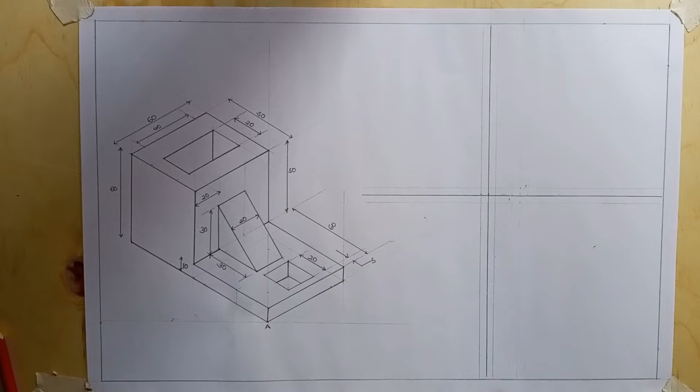Today we are going to look at the construction of orthographic views from this isometric view. So let's get started. So we are going to draw these as orthographic views in first angle projection. Remember, in first angle projection, the plan is ever down, the front up, then the end elevation this side.

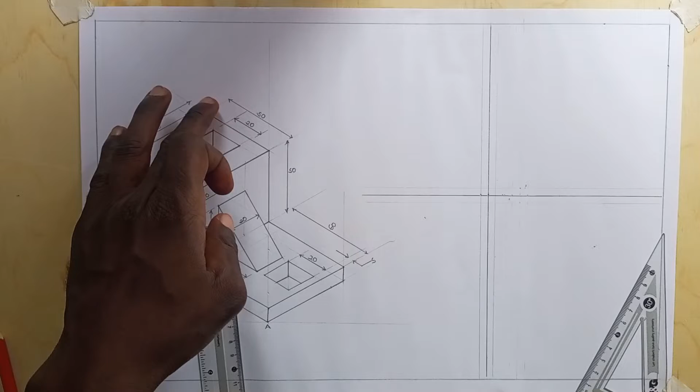So let's get started. So for the plan, I'm going to be looking at this isometric object from up. When you're looking at this object from up, you'll be seeing this face here and also this face here, inclusive of this square hollow plus this slanting edge. So first, I'm going to get the total length of this object, which is 50 plus 60. That's around 110 millimeters.

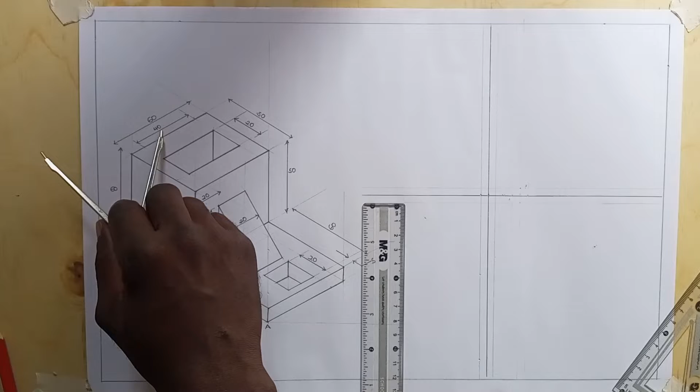So I'll measure off 110. So I also mark off 50. Okay. So in this top section, I have 50, but then I have also this hollow that goes up to the bottom, and its width here is 20 and the length is 40. So I just want to locate it here on the plan.

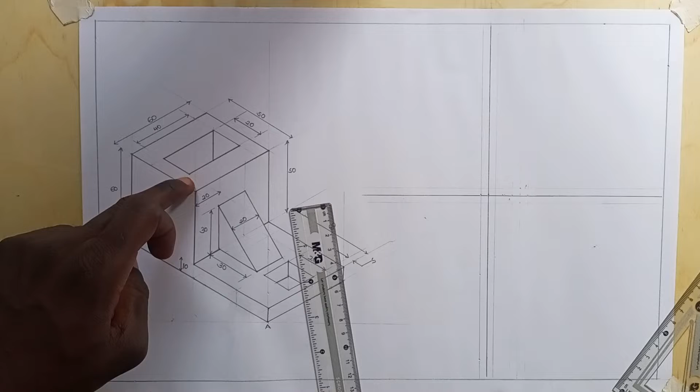So I get my 50 minus 20. So when you get 50 minus 20, you get 30. What does it imply? That this rectangle hollow is offset 15 millimeters off this edge and also 15 millimeters off this edge. So I'll measure off 15, then also this side measure off 15. Okay, so right here I'll measure off 60.

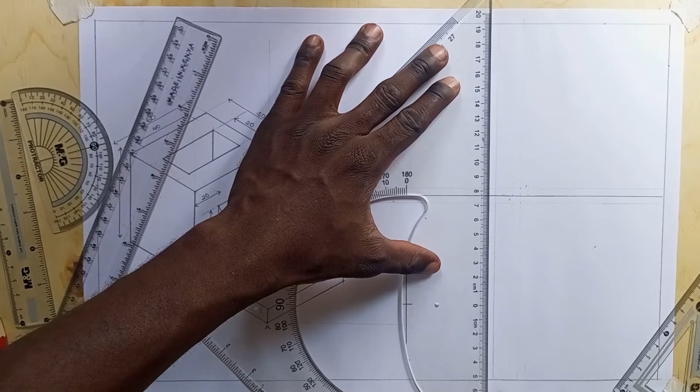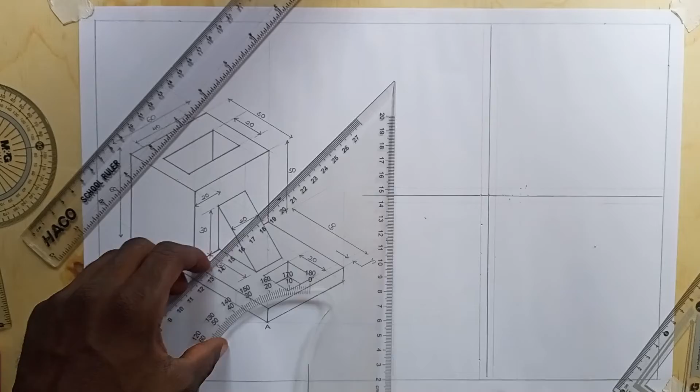So I'll slide off this line till it is at 60. I'll try to make it longer. Okay. So I'll also draw that line.

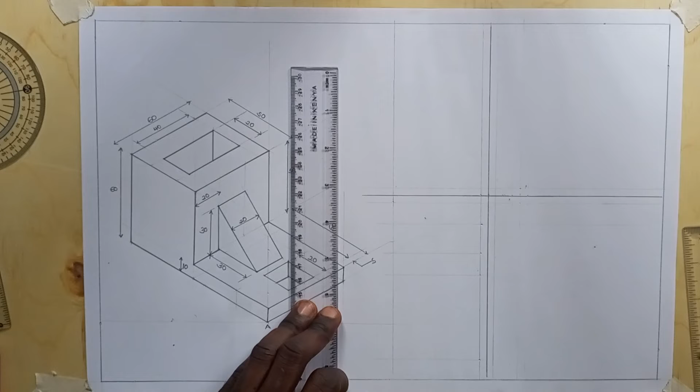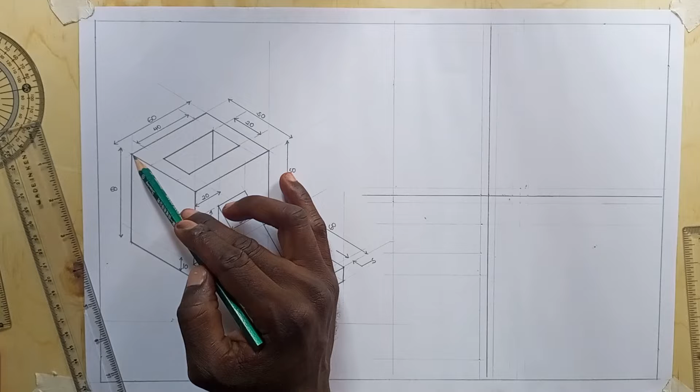Okay. So when you're done, you're going to get the offset distance of this rectangular hollow from this edge here. So if this total length here is 60 minus 40, we get 20. That means this is 10 and also this is 10. So I'll measure off 10 millimeters here. Then I also do the same thing here.

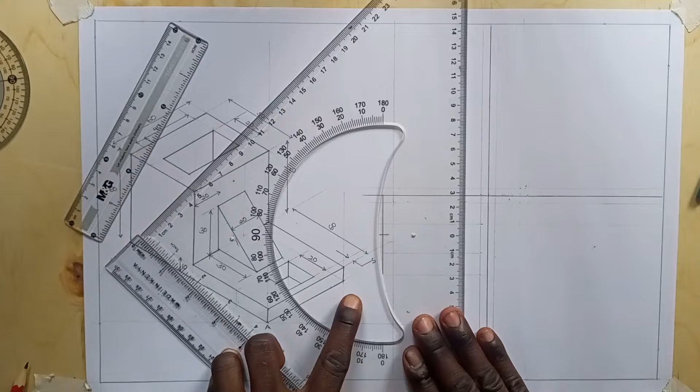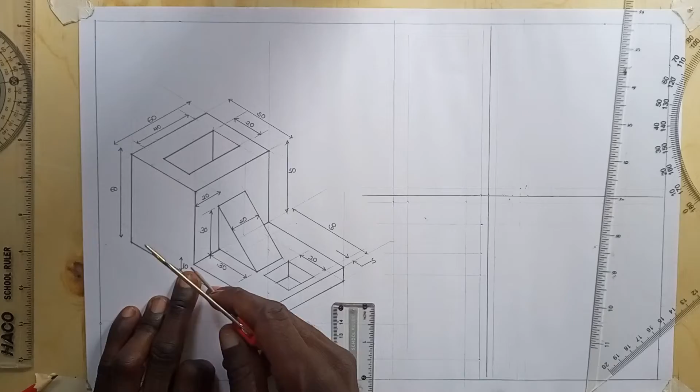Okay. So we are done with this upper surface. So I want to show you how we can draw this other upper surface. Remember, we are up. So this is how you do it. Remember, we want to draw this slanting surface. So it is 30 millimeters off this edge, which is this. And remember, we are seeing it from up. So I'll measure off my 30.

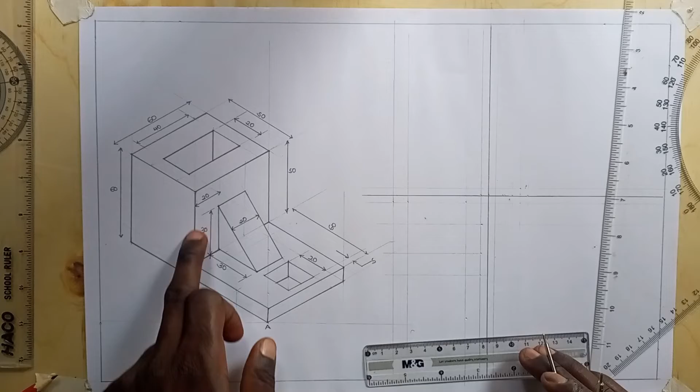Then this slanting surface here, it is 20 millimeters off this edge. So I'll also measure off 20 here. Okay. Then I'll also measure off this 20. And this also should be 20. Okay.

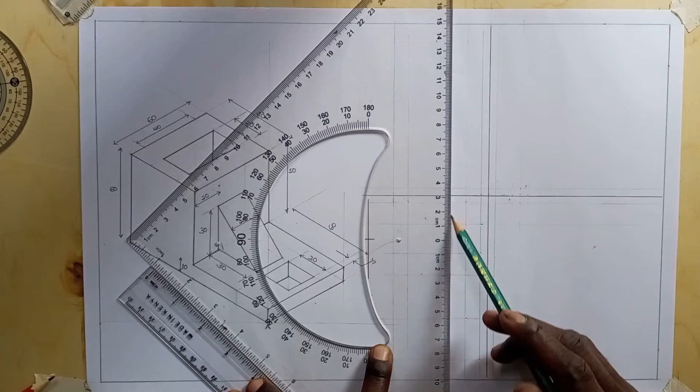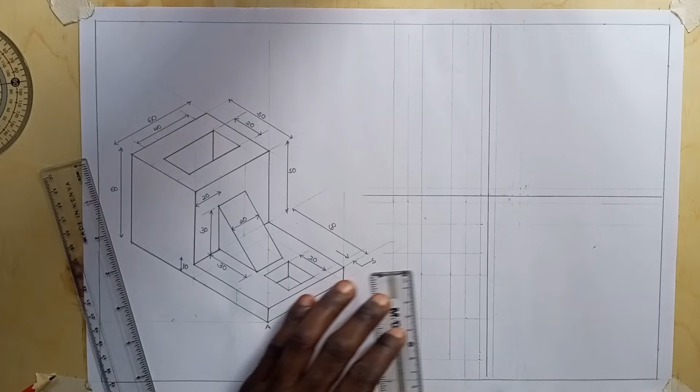Okay. When you're done with drawing this slanting surface, the next thing we are going to locate is this square hollow. So I indicated here that it is offset 5 millimeters off this edge here. So I use my ruler and I measure off 5. Then I'll also measure off 20 here.

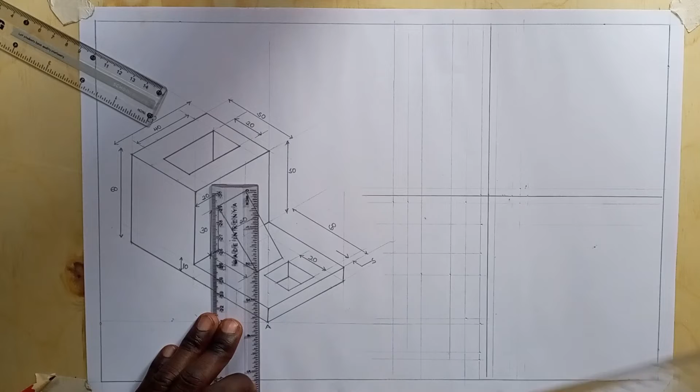I'll draw that line. And also that line there. So when you're done, we shall make our plan lines thicker such that we can bring out the real picture of how it should be.

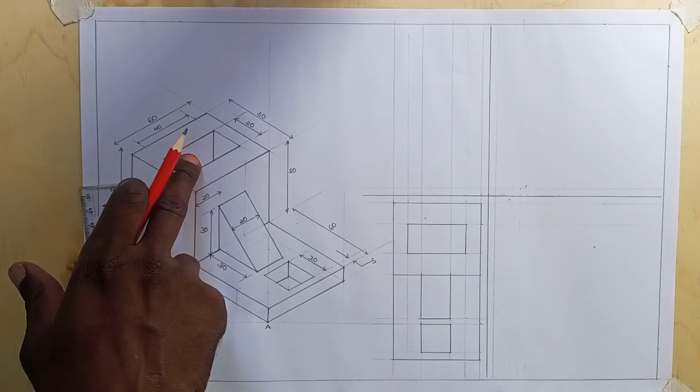So this is it. This is the plan, and for this rectangular hollow, it is this one. Then the slanting edge is this one. Then this hollow is this. So this is the uppermost surface, and this is the lower surface.

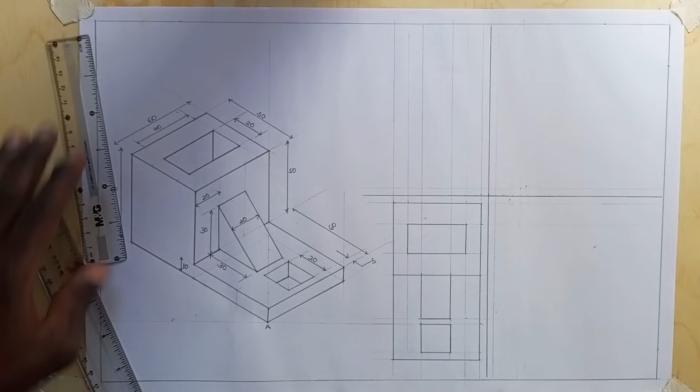So let's get to the front. So remember our front, we shall be viewing this object in this direction here. Just imagine you standing in this direction and you're viewing it from here. So the surfaces we shall be seeing are this. We won't be seeing this hollow as we have been seeing it in the plan view, because it is hidden.

And remember, you're standing here, so this surface here will be hiding it, and we shall be seeing this slanting surface. Yes, and also we shall be seeing this surface here, but we won't be seeing this rectangular hollow, just because it will be hidden by this surface here. So let me show you how you can get to it.

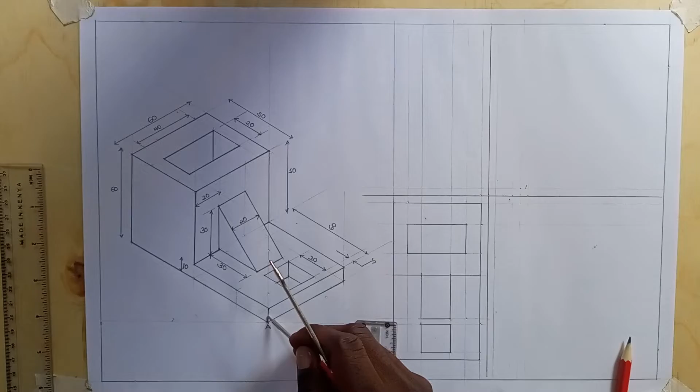So first, we are going to draw our first face, which is this. Then we shall draw this. Then we shall end up with this, and we shall also indicate this rectangular hollow, but with hidden lines. The same thing will apply to this square hollow. So first, I'll measure off 10 here.

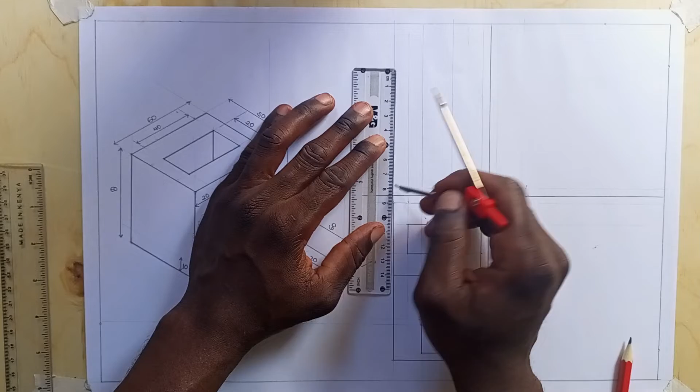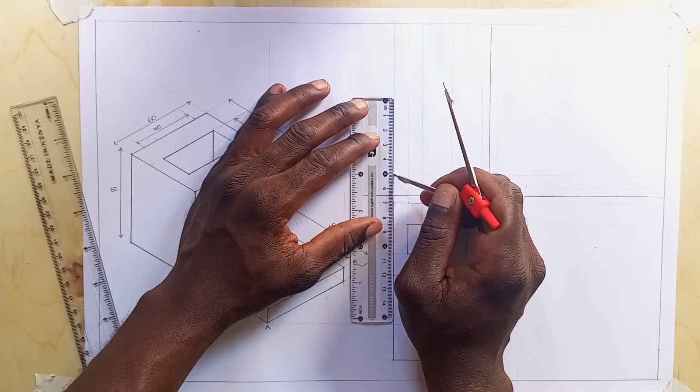Okay. Then after that, I'll measure off this distance, which is 50. Remember, the total distance here is 60. So if you subtract this 10 that we have just drawn here, the remaining distance will be 50. So it's what I'm going to measure off there. So I use my ruler. I mark off 50.

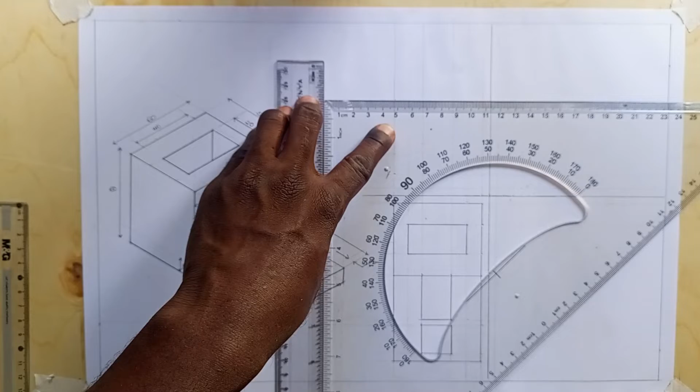Okay, when you're done, remember we are drawing our front. We're going to start with this square hollow. Remember I told you that it's going to be hidden, so I will indicate it by a dotted line, a thick dotted line.

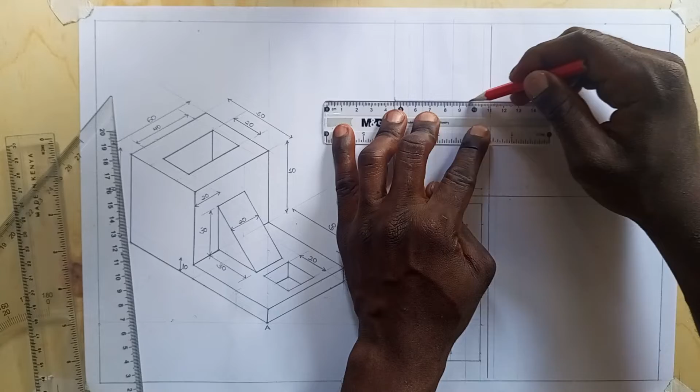So you find that this face here is this, then these dotted lines here indicate that we are not seeing this square hollow. Okay. So now

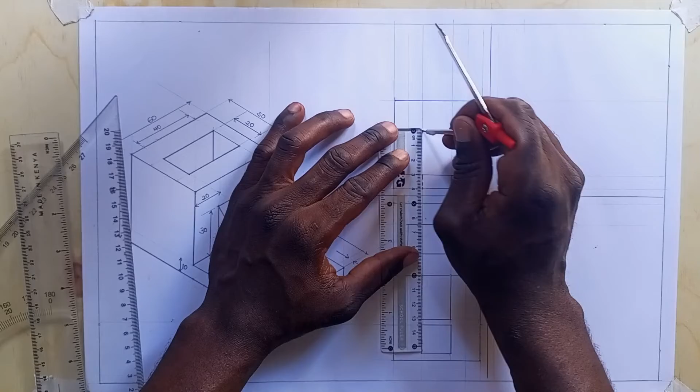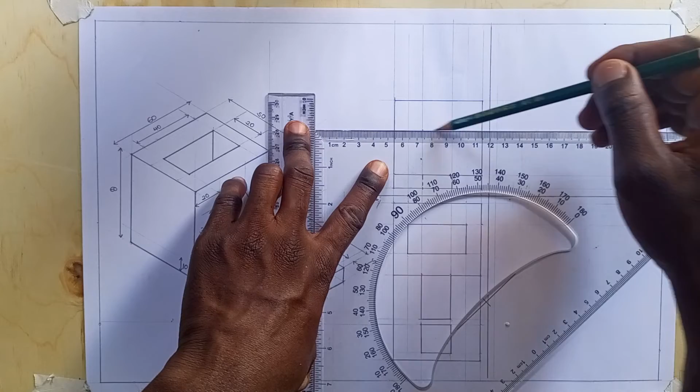remember that this slanting surface, the one that we want to draw here, is 30 millimeters off this line here, which is this also. So I'll use my ruler and I measure off 30. So I'll use my big set square, and I draw off that line. Then I'll indicate it here.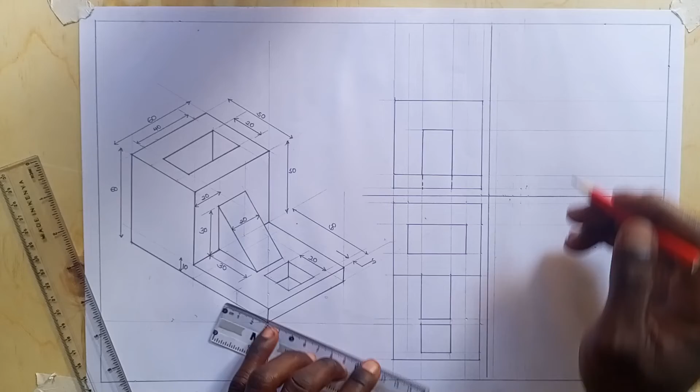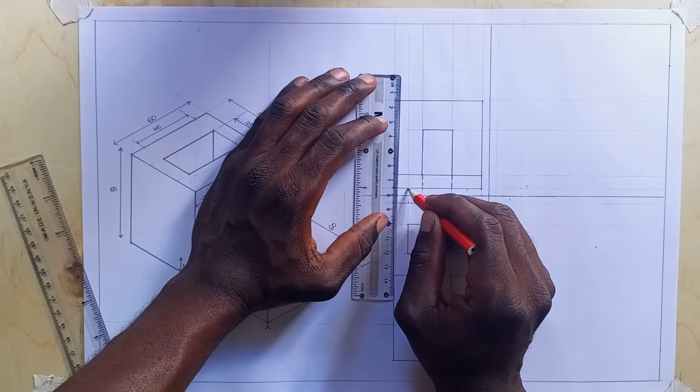Okay. So now we are going to indicate this rectangular hollow, but it's going to be hidden, so we shall indicate it with hidden lines, just as we have done with this. Remember, the lines demarcating this rectangular hollow are these ones. Since it runs through the object, we shall start right away from here.

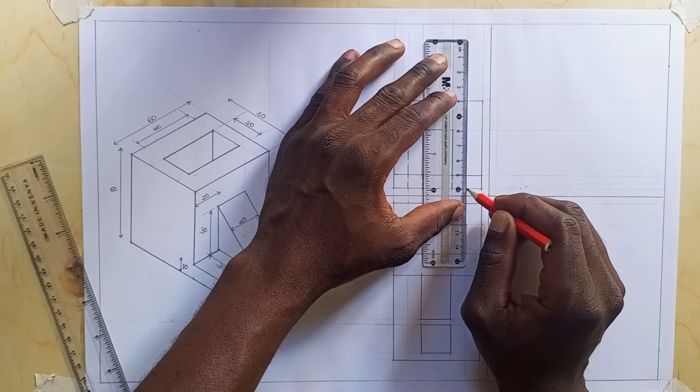I draw thin dotted lines. I do the same thing here. Okay. So that is it for the front elevation. So we are going to go to the end elevation.

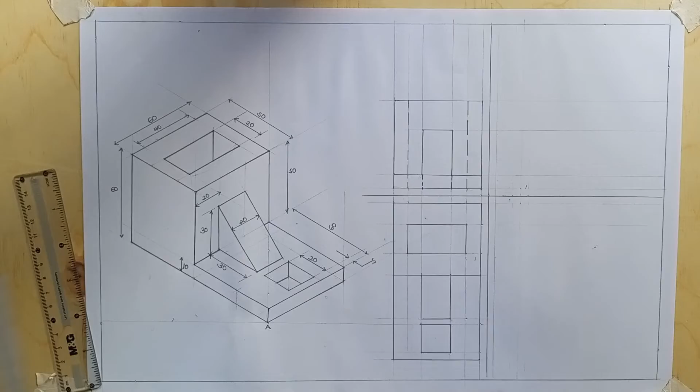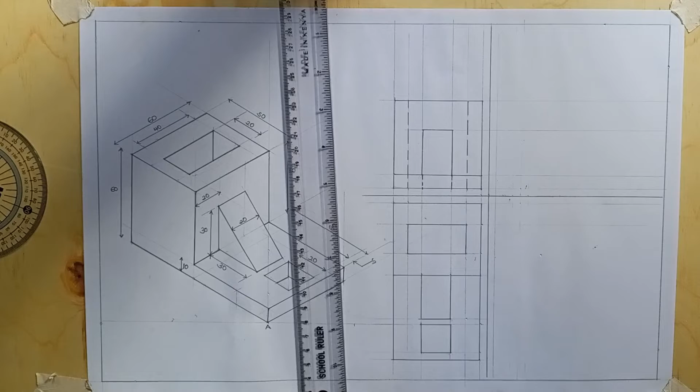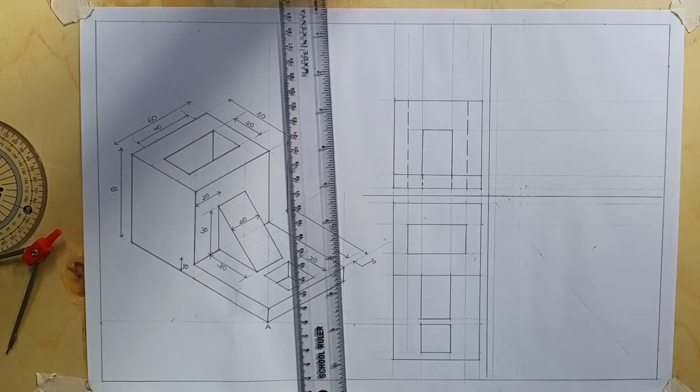For the end elevation, we are going to draw a line here that is 45 degrees to the horizontal, or 45 degrees to this vertical. So I'll use my protractor. I place it here properly, and I'll measure off 45 here. Let me make it a little bit longer. Okay.

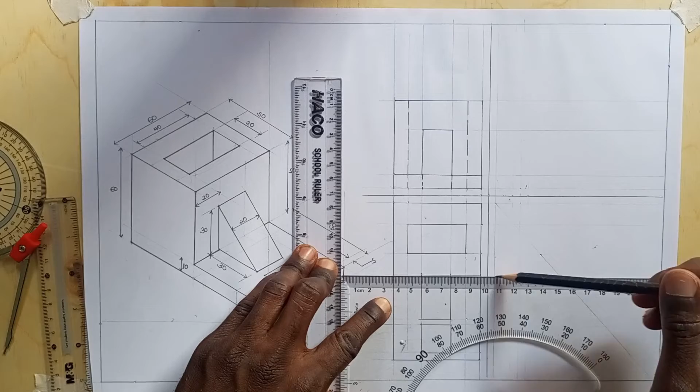So I'll start projecting these lines, because they will aid us in getting the end elevation. Okay, so I'm going to raise these lines aside.

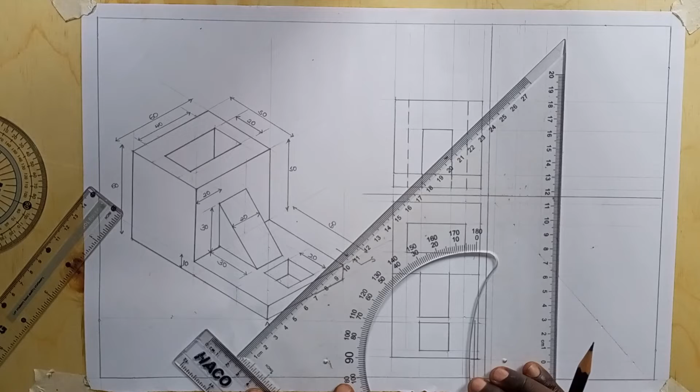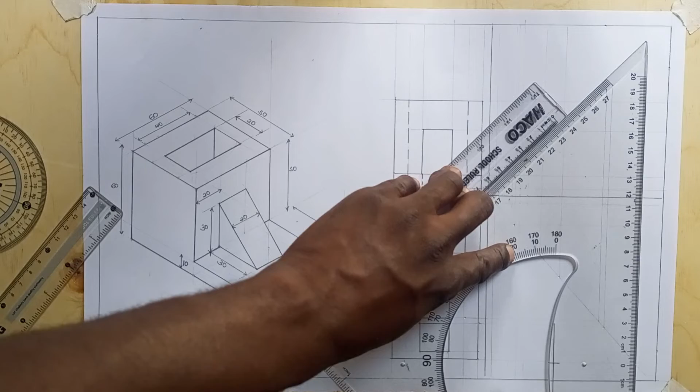So after drawing this line, I'll also draw this line here. So when you're done with drawing these lines that are projected up, we are going to locate the end elevation.

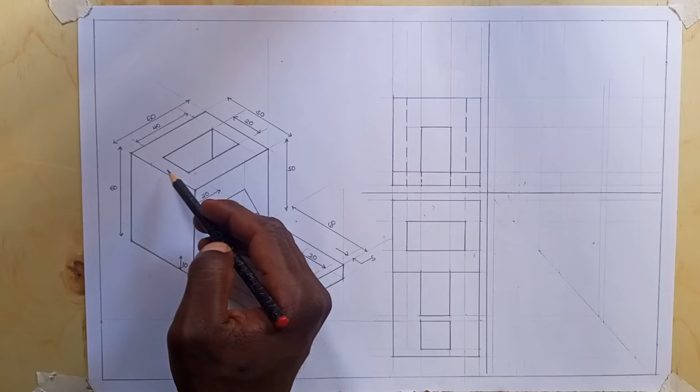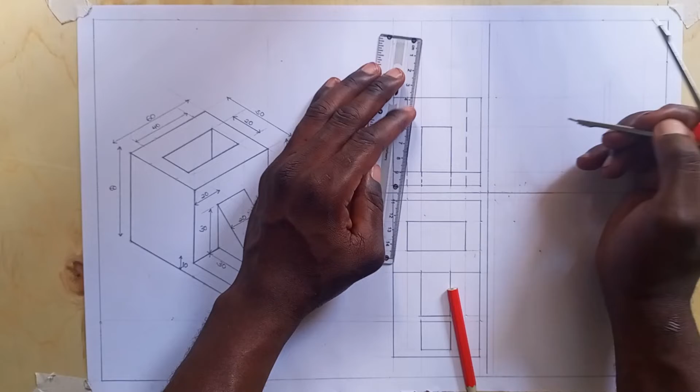Remember, for the end elevation, we shall be standing here, and the only faces that we shall be seeing will be this, and also we shall indicate the positions of these hollows, the square hollow and the rectangular hollow. So let's get started with the end. So let's get started.

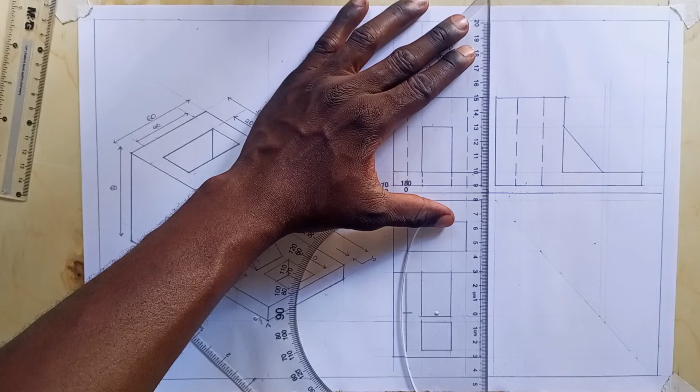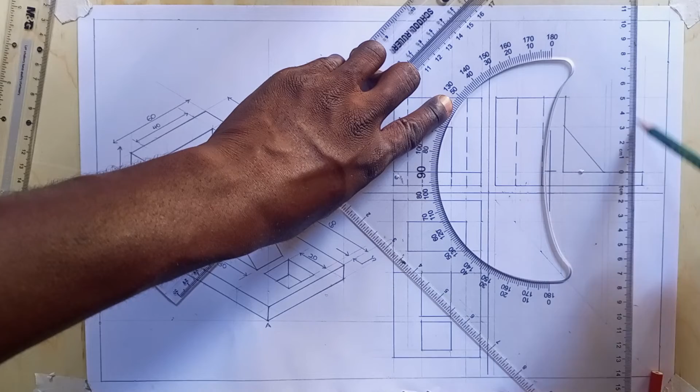So there is one line that I didn't project, so it's what I want to draw, such that we can complete our end elevation. So this one also will be dotted. Just like that.

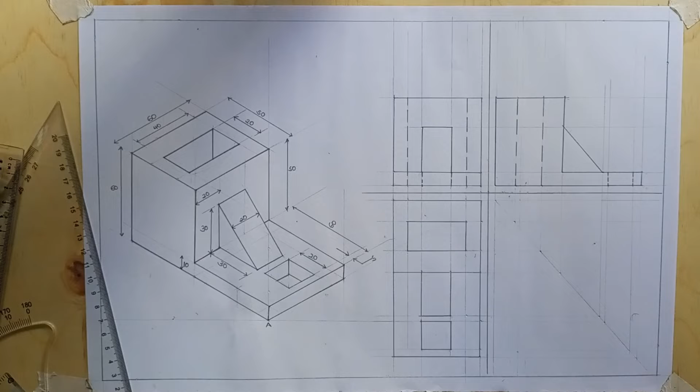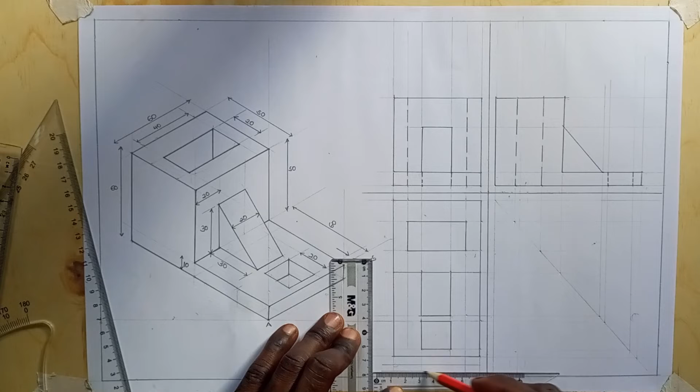So this is our end elevation, and we are soon coming to the end of the video. The next thing remaining is to include dimensions. Let me first include the names of these views.

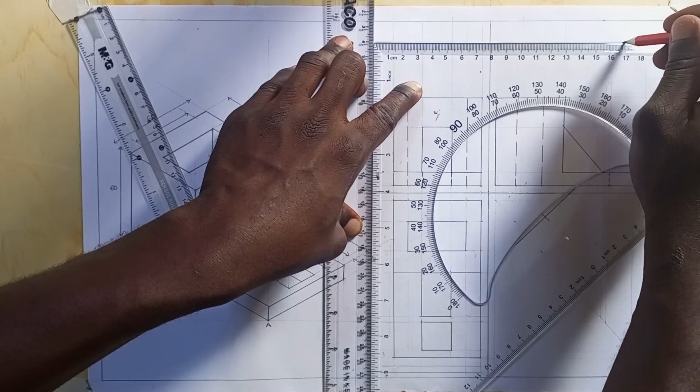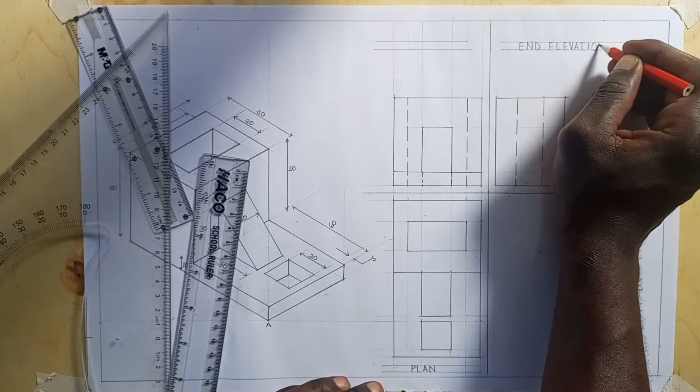So this will be the plan. And this will be the end elevation. This will be the front.

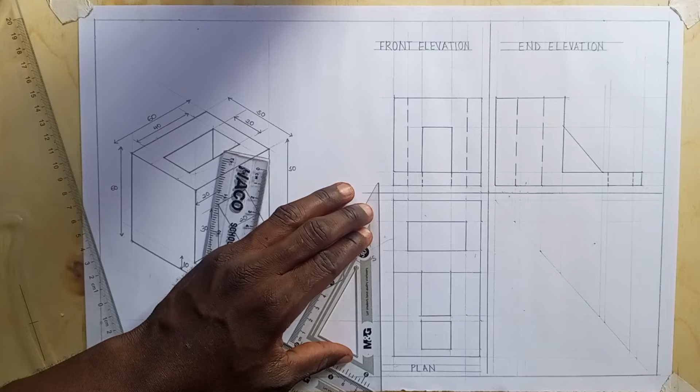Okay. So let's include the dimensions. So this is 110.

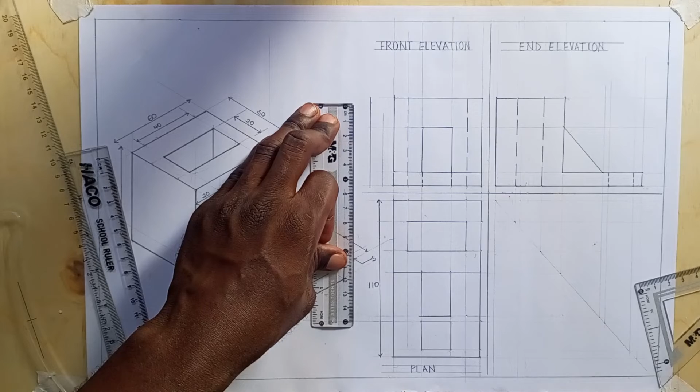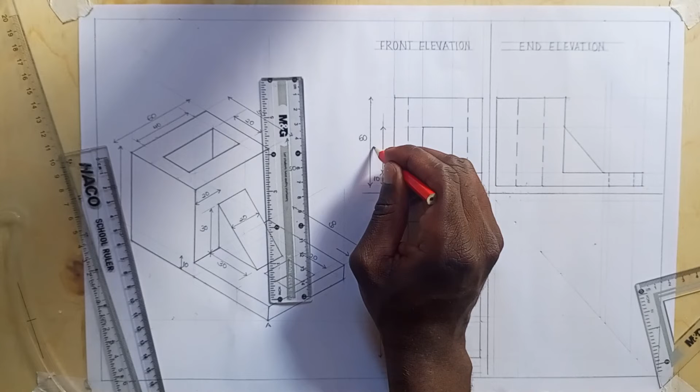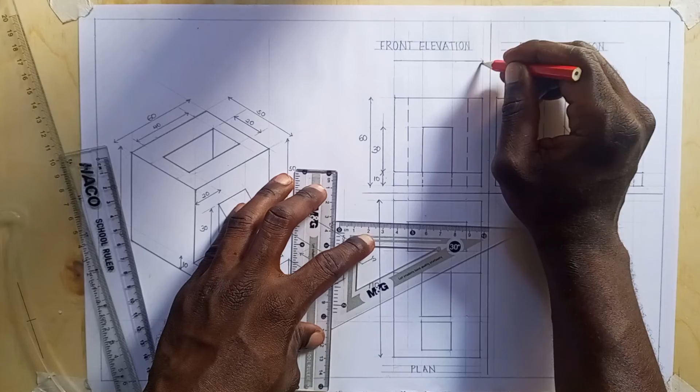So this is 60. This is 10. And right here it is 30. So this is 60.

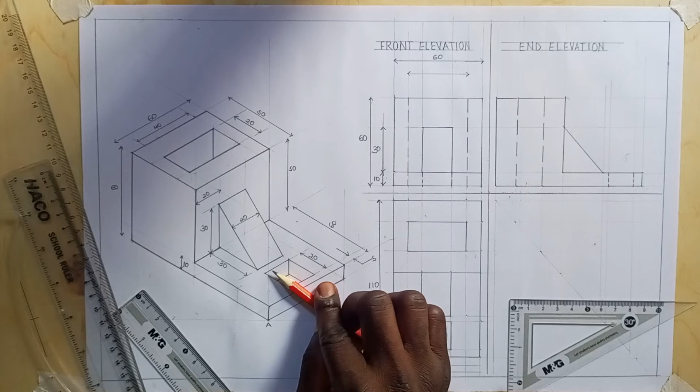So this rectangular hollow, its length is 40. It's what I will include here, because remember we're dimensioning the front, so if you're standing here, you'll be capable of viewing this length. So this is 40. Okay. So this is 20.

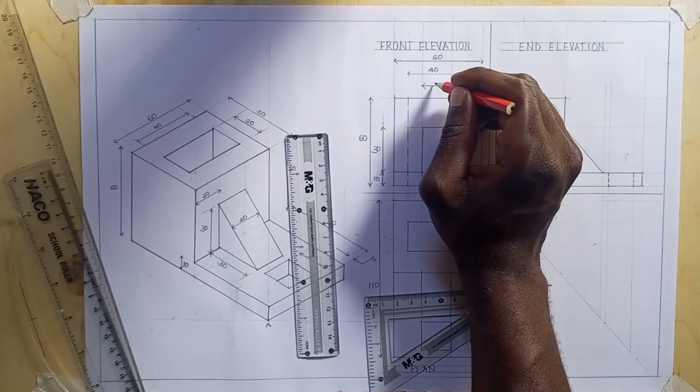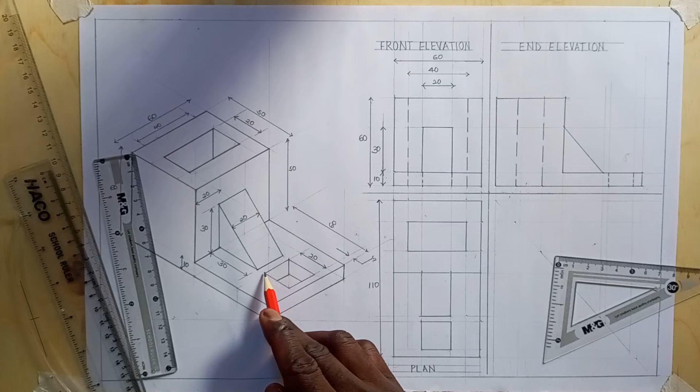So remember this slanting surface here is also 20, like the thickness is 20, which is this, and also this square hollow is 20 by 20. So this will be 20.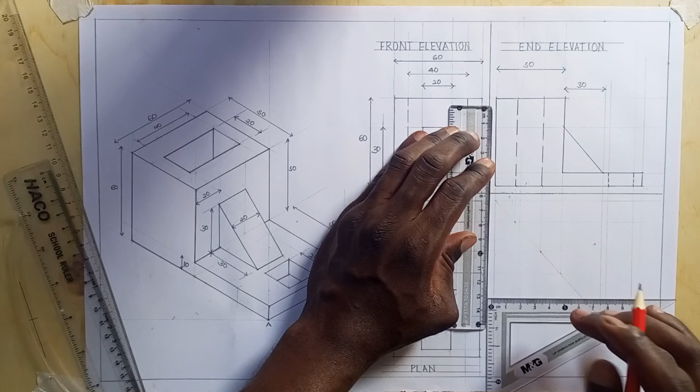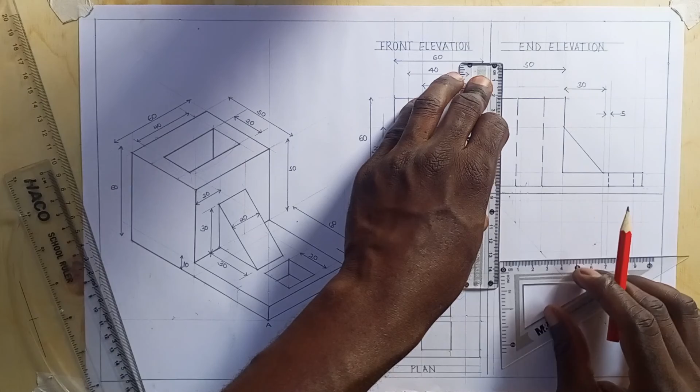So this is 30. This will be 5, which is this here. This will be 20.

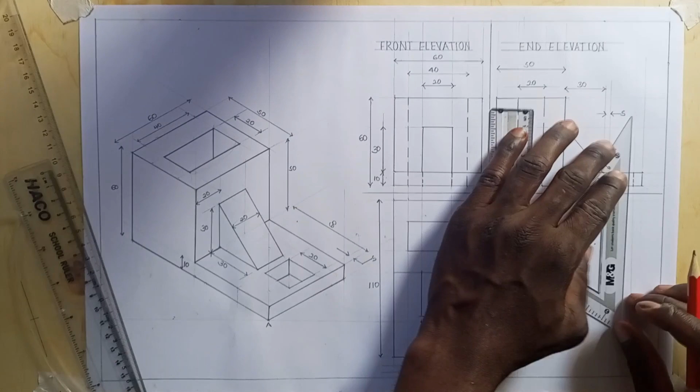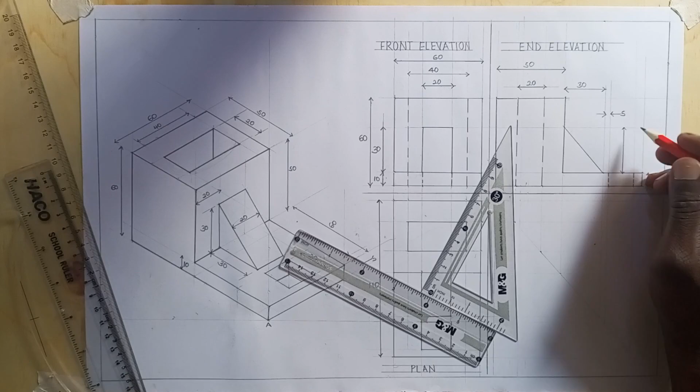Then this one here will be 10. One more dimension that I need to include here. This is also 30.

So we have come to the end of this video.